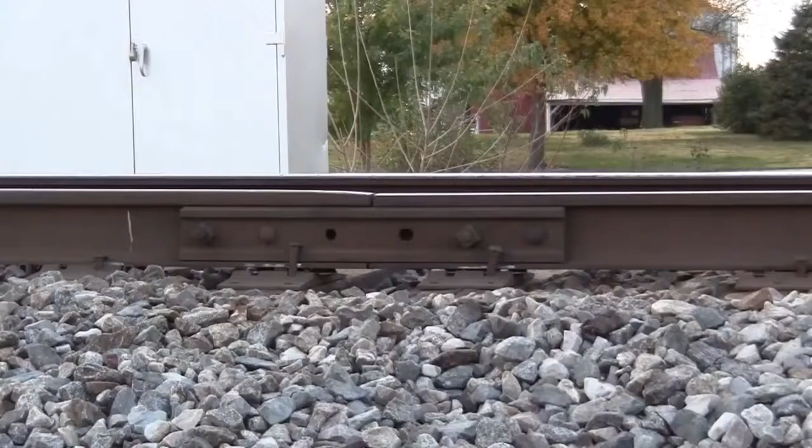Metal fatigue is the weakening of a material caused by repeatedly applied loads. It is the single most important type of damage causing fractures in mechanical systems, with probably even over 90% of all mechanical failures being related to metal fatigue.

The fatigue lifetime is expressed in cycles, which refer to the application of the loading in a specific application. A cycle in this railway application, for instance, can be seen as the passing of the wheels over the track joint, thereby applying the load and releasing the load during each such cycle.

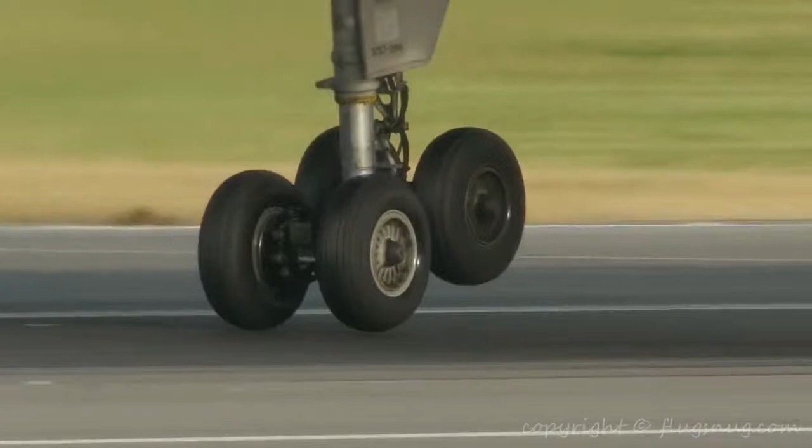For airplane components, fatigue cycles are often related to the number of flight cycles. This is, for instance, the case of a landing gear, which is loaded once every flight during the landing phase. For rotating machinery, such as the jet engine of an aircraft, one cycle is one revolution of the jet engine.

As announced by the NTSB, the most recent aviation accident was caused by metal fatigue in a fan blade of the jet engine, causing one of the fan blades to fly out of the engine, hit a cabin window, and kill one passenger.

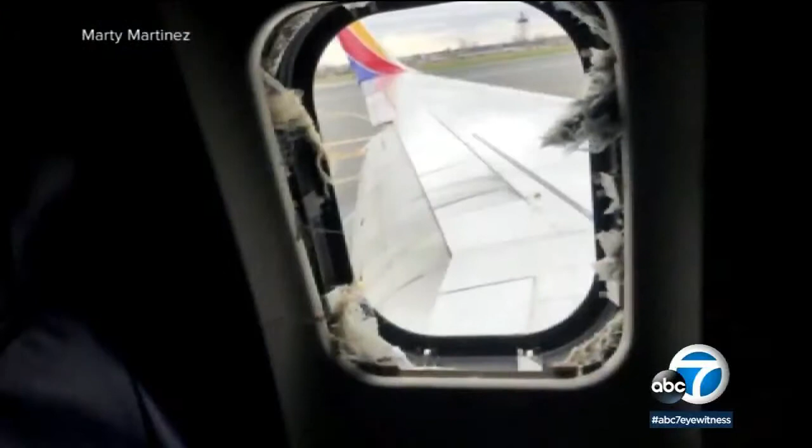Most of these fatigue failures occur unexpectedly and require dedicated maintenance schedules based on non-destructive testing techniques. These schedules are developed such that a growing fatigue crack will not reach dangerously large sizes in between two inspections. Mechanical failures are prevented by replacing the component when a crack is detected.

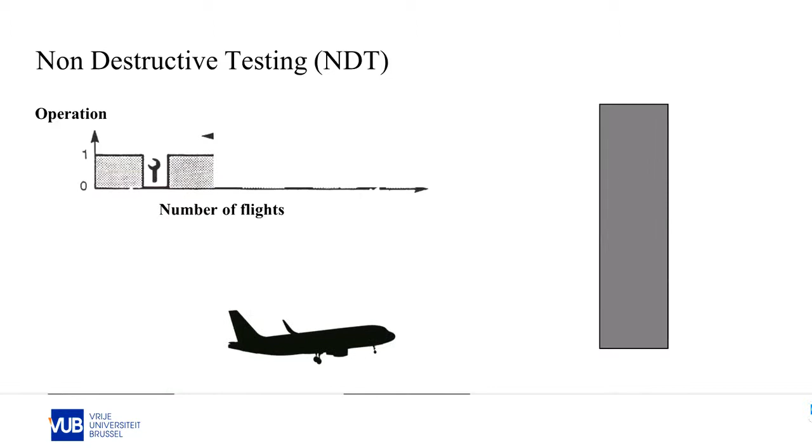Based on the number of flight cycles, the fatigue resistance of the material, and the specific non-destructive testing technique being applied, a fixed maintenance schedule is proposed. Not all of these inspections will reveal cracks. Cracks may not be present or remain undetected by the inspection method.

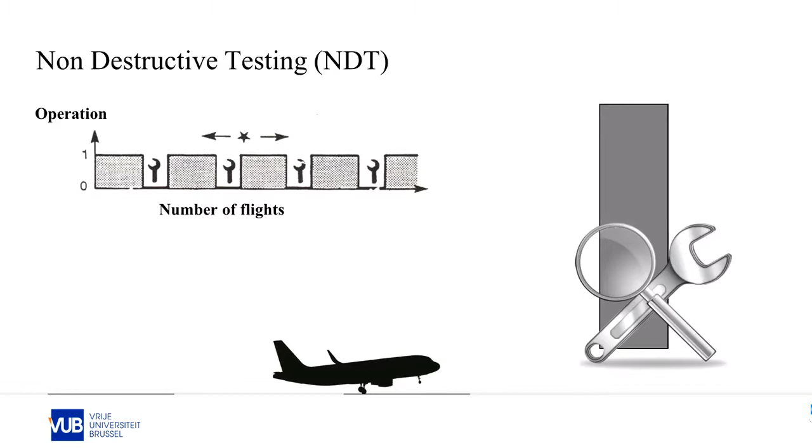Especially with new materials and novel production technologies, of which the material behavior is still unknown, a different approach is necessary. Structural health monitoring is the integration of damage sensors inside the component, in such a way that non-destructive testing becomes an integral part of the structure.

The system automatically detects the upcoming failure and requires an intervention only when such damage is detected. The downtime of large infrastructure and maintenance costs are reduced, as unnecessary interventions are avoided. By implementing a system that continuously inspects for damage, safety levels are increased, especially concerning those novel materials with unknown fatigue behavior.

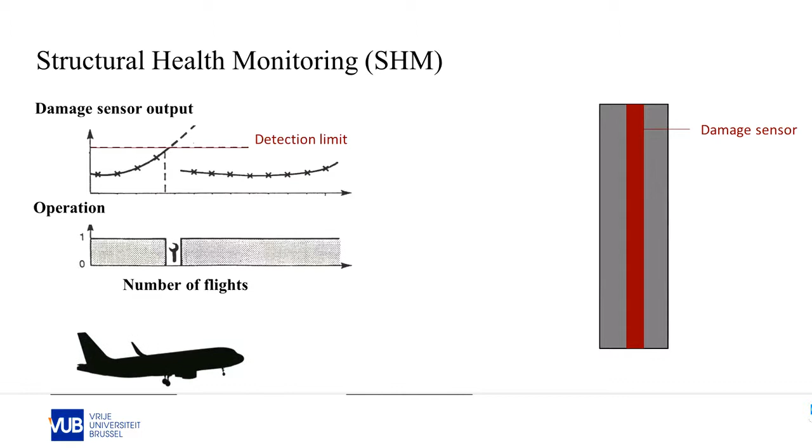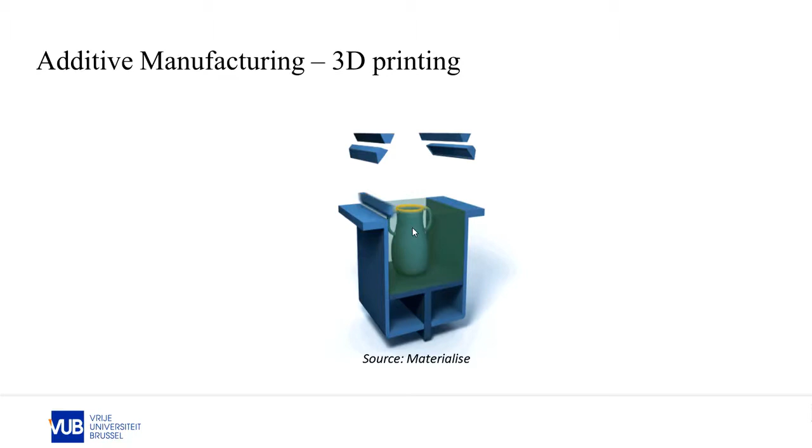Additive manufacturing is one of such novel manufacturing techniques currently investigated. It is the layer-wise addition of material in order to create three-dimensional objects. The design freedom offered by this new technology allows designing lightweight components with integrated functionalities. Despite many advantages, the current application of additive manufacturing in aerospace is still limited, because of the unpredictable material behavior related to fatigue.

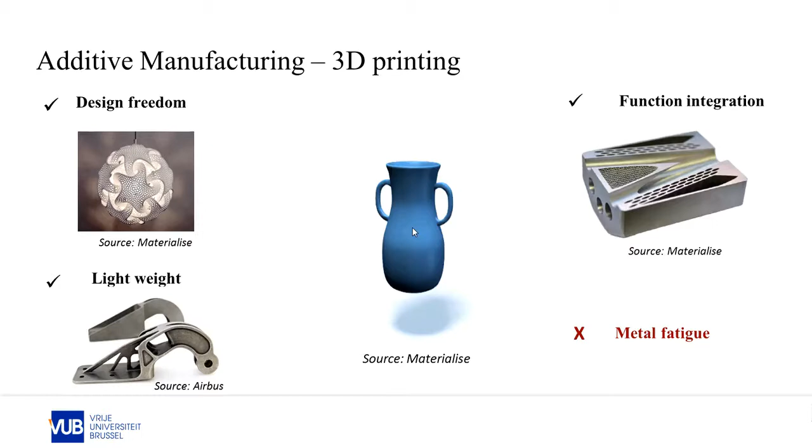This research work is therefore focused on the development of a structural health monitoring concept that is in particular suitable for the monitoring of additively manufactured parts. Our patented effective structural health monitoring system, also abbreviated as the ESHM system, is based on the principle of monitoring the pressure level inside the capillary that is integrated during the additive manufacturing process.

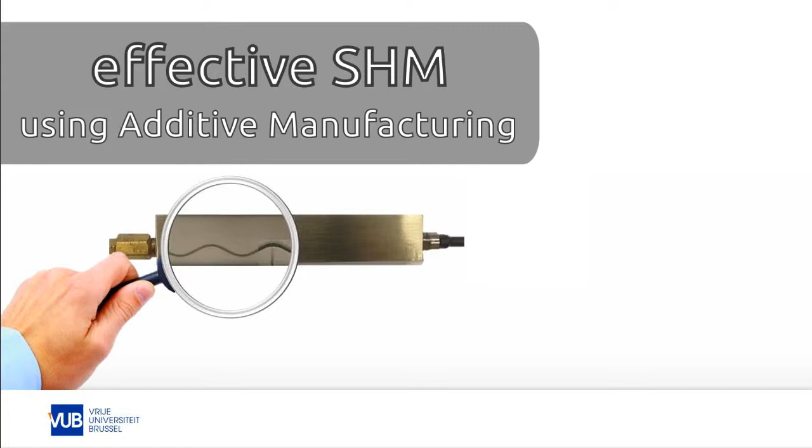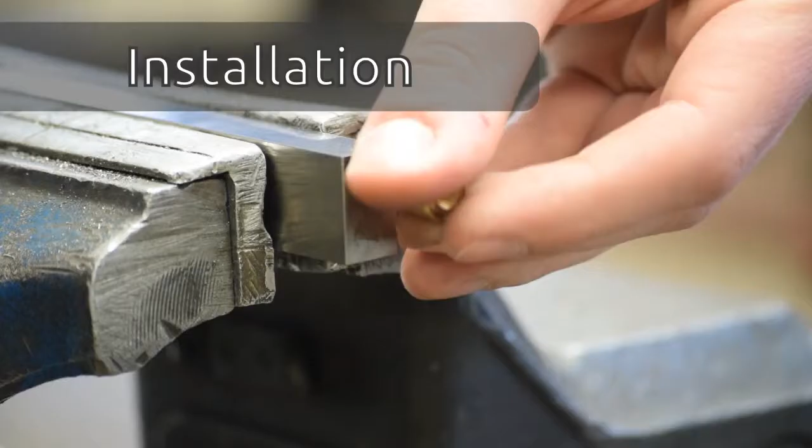The principle has been demonstrated based on 4-point bending fatigue tests on rectangular additively manufactured beams with an integrated capillary. After the additive manufacturing process, the beams are milled to the exact dimensions and a check valve is installed to one end of the capillary.

The check valve allows reducing the capillary pressure to vacuum conditions while preventing the air from entering the capillary again when the specimen is taken out of the vacuum oven.

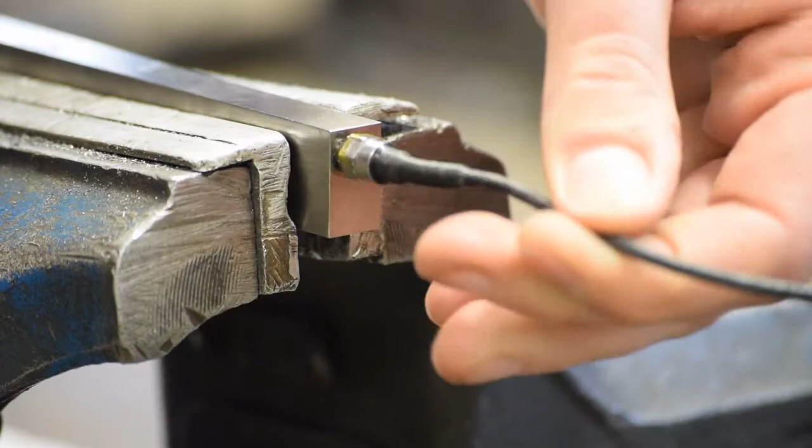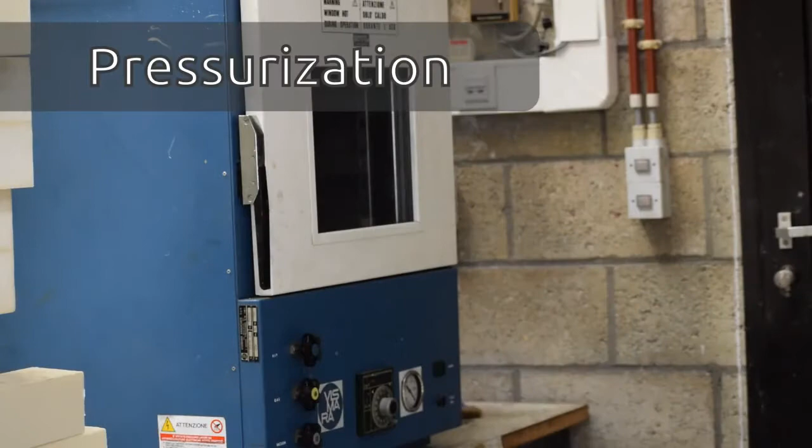An off-the-shelf available pressure sensor is mounted to the other side of the capillary and will record the pressure level inside the capillary during testing. After installation of the pressure sensor and check valve, the specimen is placed in a vacuum oven in order to reduce the capillary pressure well below ambient conditions.

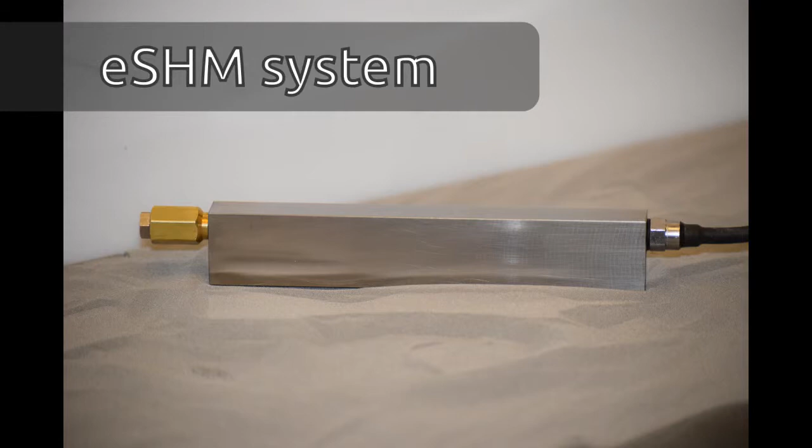When a fatigue crack grows through the capillary, a leak flow will result and alters the capillary pressure. The basic principle of the ESHM system is therefore based on the sensitivity of the capillary pressure to small leaks. The ESHM system is now ready for testing.

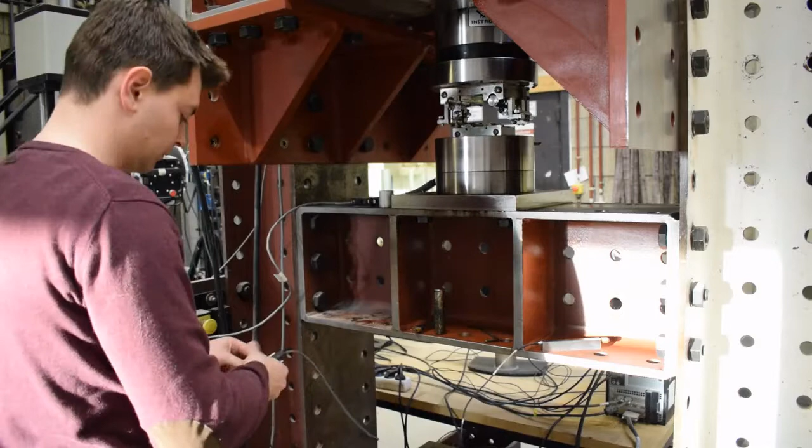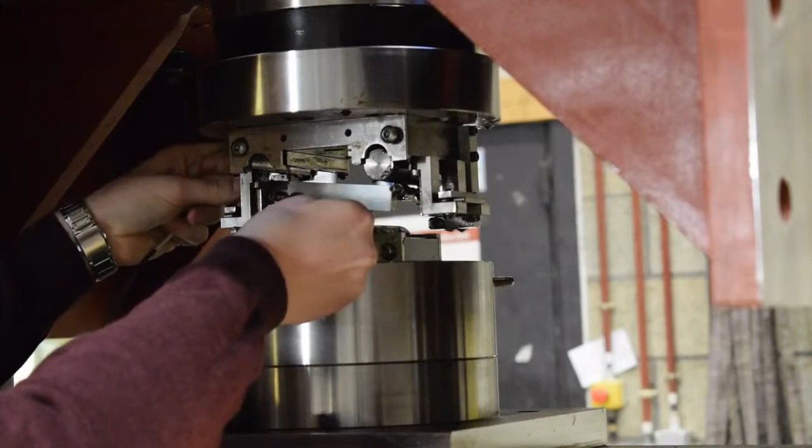The fatigue test will be automatically stopped by the ESHM system. The pressure sensor of the ESHM system is therefore connected to the fatigue test bench. The specimen is then subjected to multiple load cycles at ever-increasing loads to find the fatigue strength of the specimen with integrated capillary.

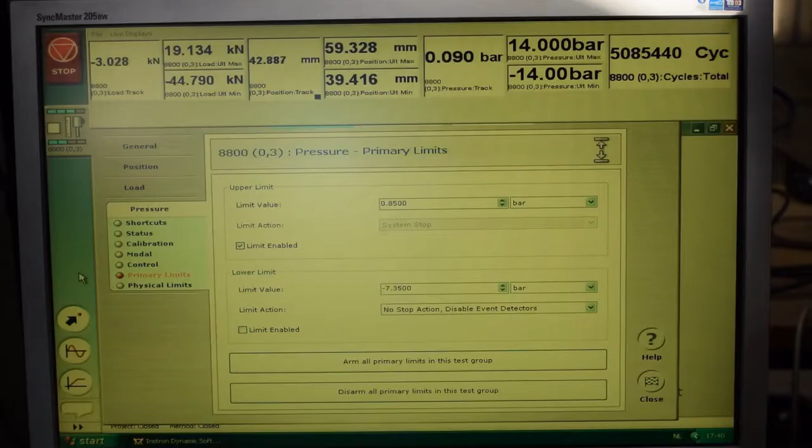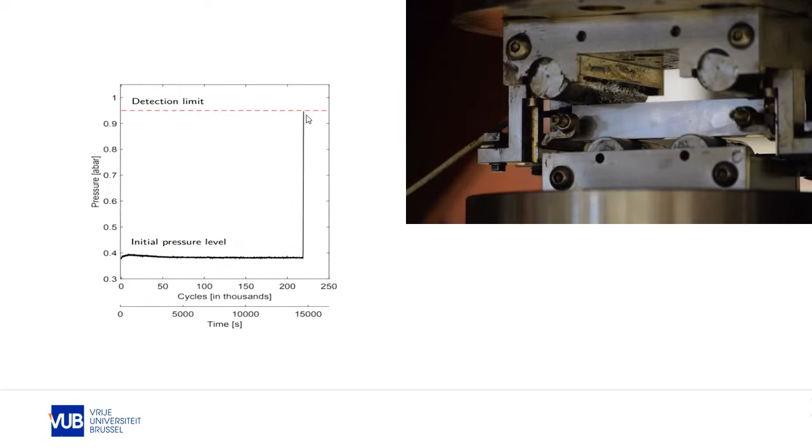At the start of the fatigue test, the pressure remains constant at the initial pressure level. However, when a fatigue crack is present, the pressure starts rising. The fatigue crack is detected and the fatigue test is stopped when the pressure inside the capillary surpasses a preset limit. The steepness of the pressure rise depends on the size of the fatigue crack.

Besides the actual detection of the damage, the ESHM system also provides the investigator with an indication of the size of the crack.

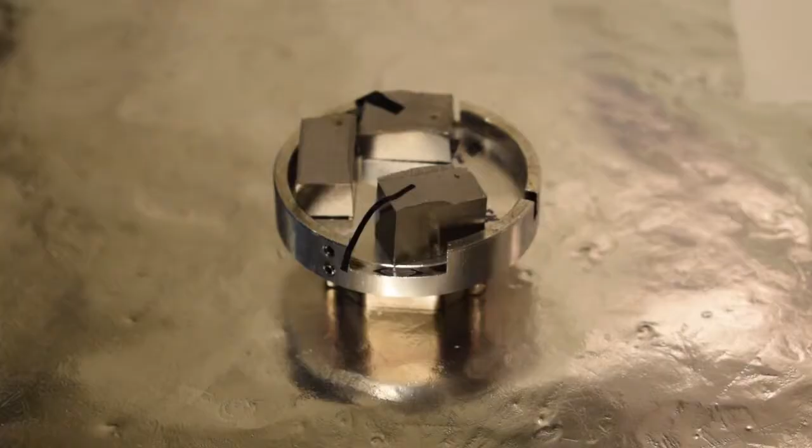In over 60 fatigue tests, the ESHM system always detected the presence of a fatigue crack before final fracture of the component. But fatigue testing reveals more than the proof of concept of the ESHM system.

It allows analyzing the effect of the capillary on the structural integrity of the part. Fracture analysis reveals where the fatigue crack initiated, and if the presence of the capillary did contribute to the fatigue initiation. Therefore, the fracture surface of the specimens are analyzed using scanning electron microscopy. A profound investigation allows determining the fatigue initiation location and cause.

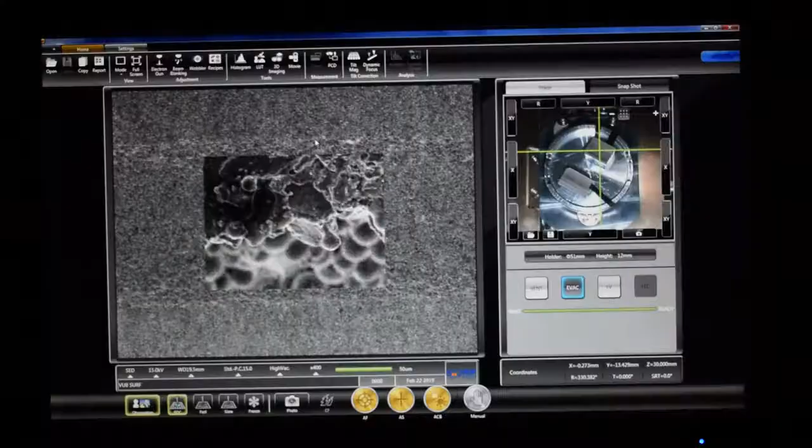Also, the quality of the capillaries produced by additive manufacturing were investigated. The capillary surface is critical for the well-functioning of the ESHM system. Comparisons were made between as-built specimens and post-processed specimens. In general, the capillary surface roughness is found to be critical for fatigue initiation, but post-processing allows reducing the capillary surface roughness to a great extent.

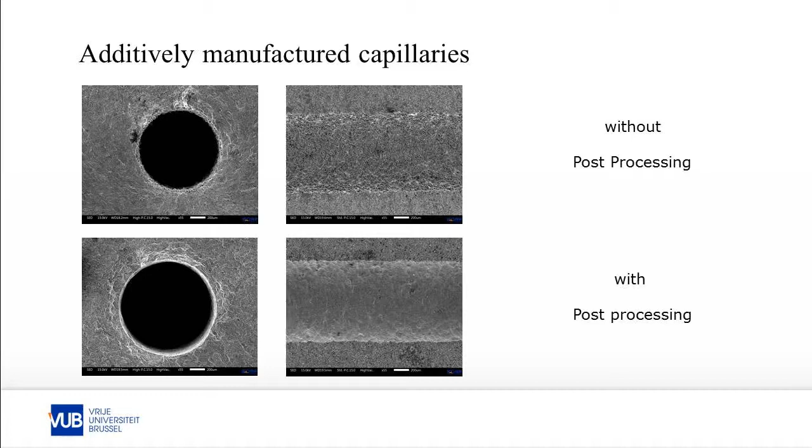If one would install two pressure sensors, one on each side of the capillary, an indication of the location of the damage can be retrieved.

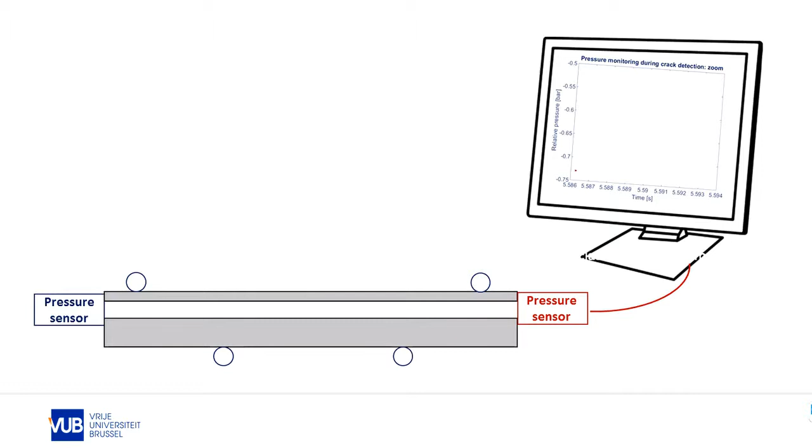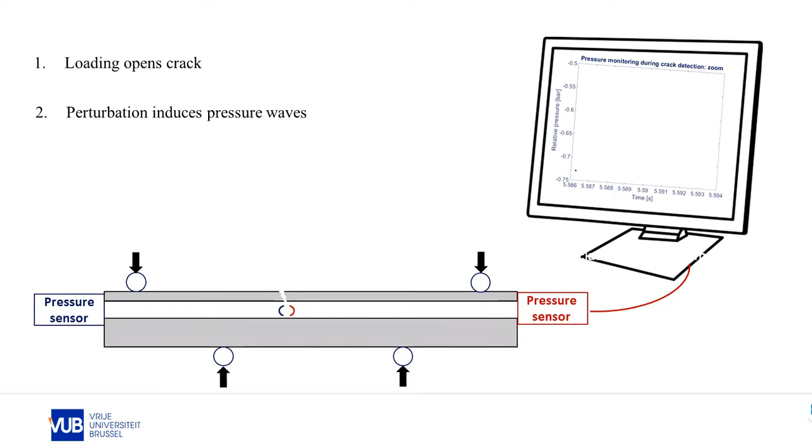Indeed, the application of the loading opens the crack. The perturbation caused by the abrupt density change at the leak location causes the generation of pressure waves. These pressure waves travel at equal speeds to both sides of the capillary. The pressure sensor, which is located closest to the fatigue crack, will record the pressure wave first. The difference in time of arrival at both pressure sensors is an indication for the location of the fatigue crack.

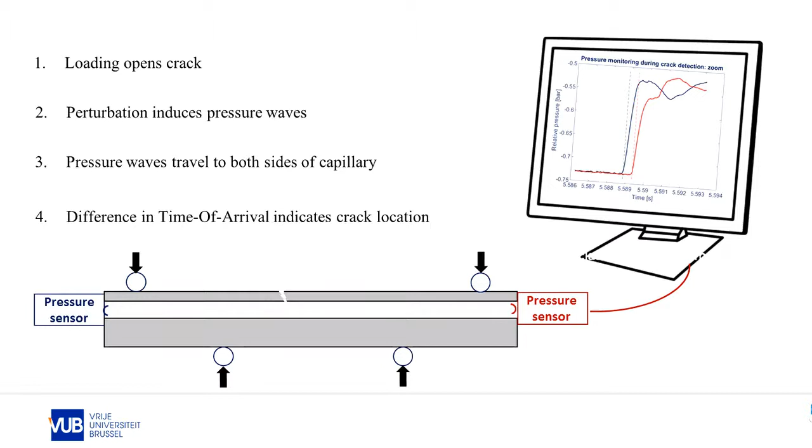The structure when subjected to fatigue loading also deforms the integrated capillary. As a result, pressure fluctuations are recorded inside the capillary that are closely related to the loads acting on the structure. Based on loading history and material knowledge, this relationship can be exploited to predict the potential damage present inside the component.

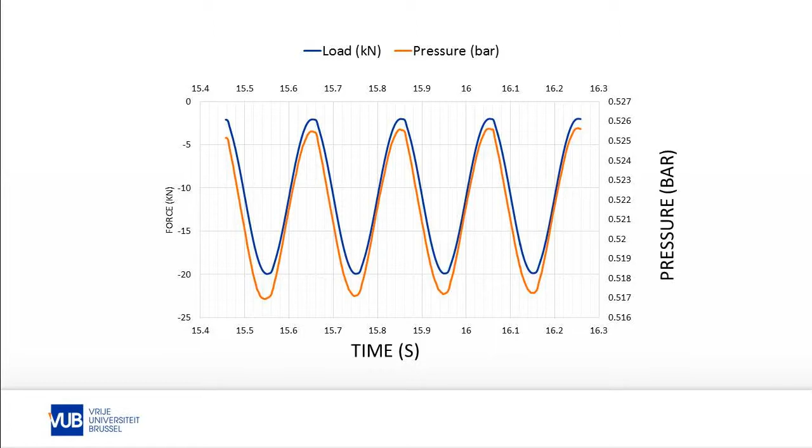The ESHM system is a robust damage detection system that is furthermore able to estimate the size and location of the damage. Continuous monitoring of the capillary pressure of the ESHM system even allows tracking the load history of the component. The likelihood of damage on the component then can be predicted based on the load history and known material response to that loading.